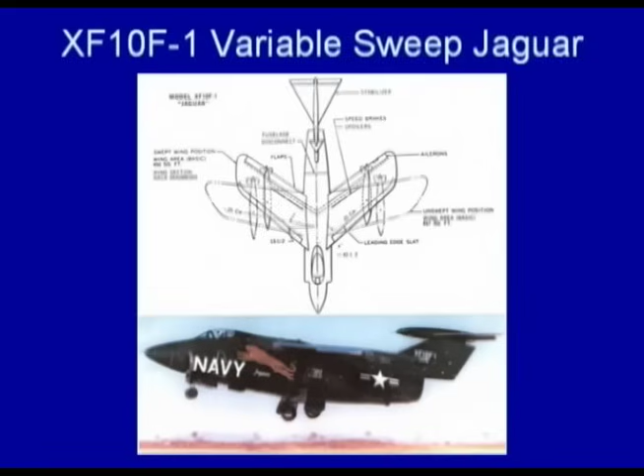Now let's go back and talk about the variable sweep history. This is a shot of the XF-10F variable sweep Jaguar. This was started in 1947. It morphed into a translating variable sweep wing, and it had an all-flying horizontal tail. You can see that right here on this particular chart.

Now, there were a lot of unique features about the XF-10F. It had a translating variable sweep wing. It had 80% Fowler flaps and paddle spoilers. Grumman, in a non-traditional sense, threw all their eggs into one basket, which was not the way we designed airplanes back then. Bill Schwendler, the chief engineer, allowed one new thing at a time, but he allowed the chief designer here, Gordon Israel, to do that.

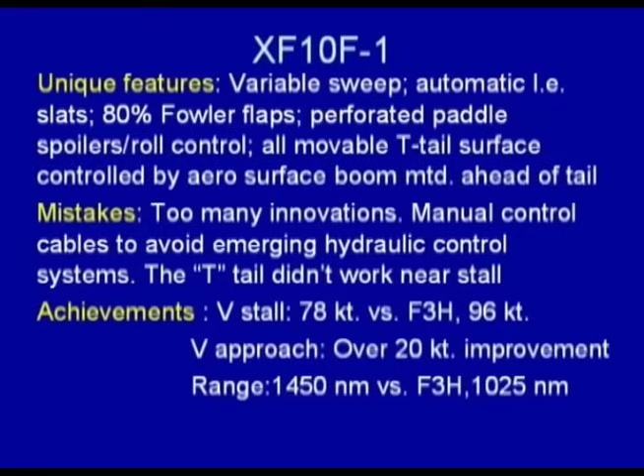There were too many innovations, but what really happened on the XF-10F is that it proved that the variable sweep wing would lower the approach speed by over 20 knots and almost a 50% increase in range over the F-3H Demon, which was operational in the fleet at that time. That was a conventional swept-wing fighter.

Now we move on to the F-111A, F-111B story. This began in 1959 when John Stack proved that you could actually create a variable sweep design and make it work with a fixed pivot.

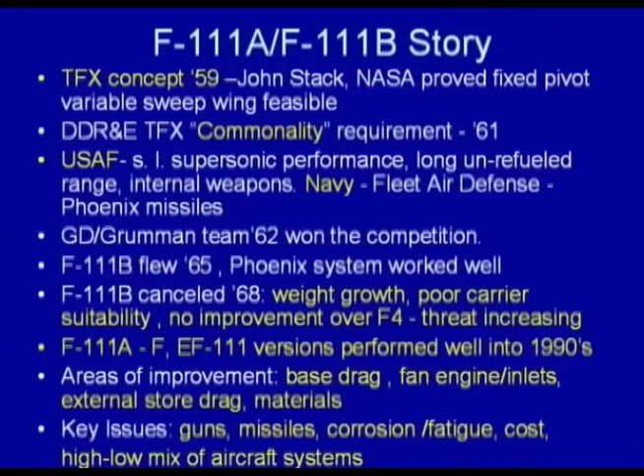That led General Everest to move ahead with a commonality requirement. He said we can design an airplane that could satisfy the USAF needs and the Navy needs, shown in Fleet Air Defense, and fly supersonically at low altitude at Mach 1.2 for 200 miles to penetrate the Soviet Union defenses. GD and Grumman won that competition, and Grumman was responsible for the F-111B. Unfortunately, it was canceled.

The reason it was canceled: it had unmitigated weight growth and really not very good carrier suitability. Although later they said they could do it, it had very poor vision over the nose, and the weight was just getting out of hand.

The big thing about it was it had no real air-to-air capability. It could not outmaneuver the F-4 Phantom. During the Vietnam War, the exchange ratio was about 1-to-1 with the MiG-21s until our tactics and pilot training made it better.

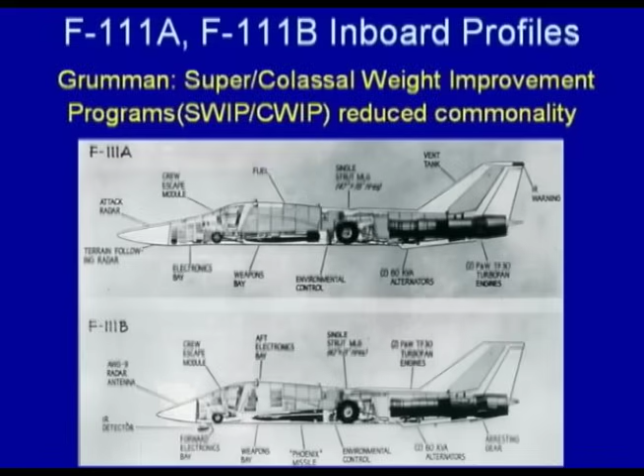But there were a lot of things learned from the F-111B which we took on to future designs: the treatment of base drag at the tail end of the airplane, how inlets interact with fan engines, external store drag and materials, as well as the use of guns and how missiles were really used in combat.

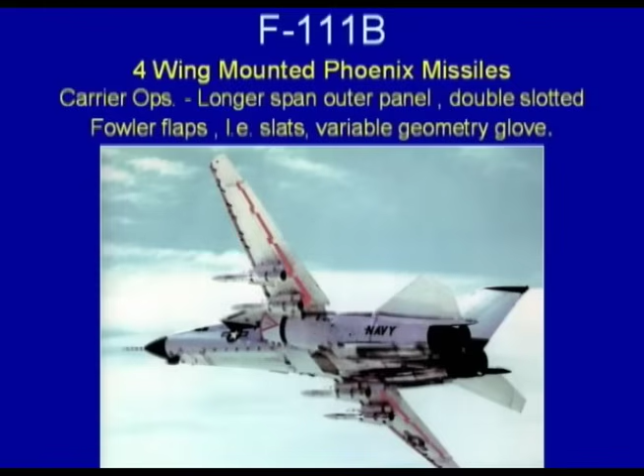This is a picture of the F-111B, one of the flight test birds. It had quite an advanced wing, shown here at about 26 degrees of sweep. It had double-slotted Fowler flaps and a movable variable geometry glove to achieve a lift coefficient of about 2.9.

It was not a good carrier suitability airplane in terms of approach and vision over the nose. The real drawback was the Phoenix missiles, which had to operate on swivelable pylons, which was a very cumbersome, unreliable, and highly drag-related item.

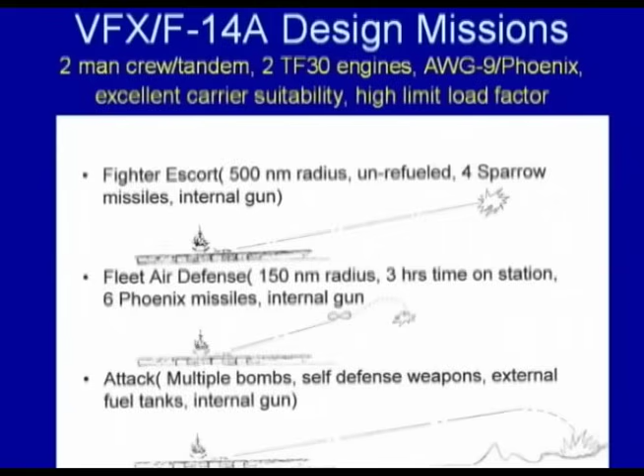So with all this background, the VFX competition was launched in 1968. The VFX became the F-14A. What the Navy wanted was a fighter for the fighter escort mission: fly 500 miles unrefueled with 4 Sparrow missiles and a gun, and they got that.

That mission only needed about 14,500 pounds of fuel, but the designers at Grumman had to satisfy the Fleet Air Defense mission, which required over 16,000 pounds of fuel. So they designed the internal fuel capacity for the Fleet Air Defense mission, but when they looked at its structural load factor, it was all based on the fighter design gross weight of the fighter escort mission. Some very good thinking went on there.

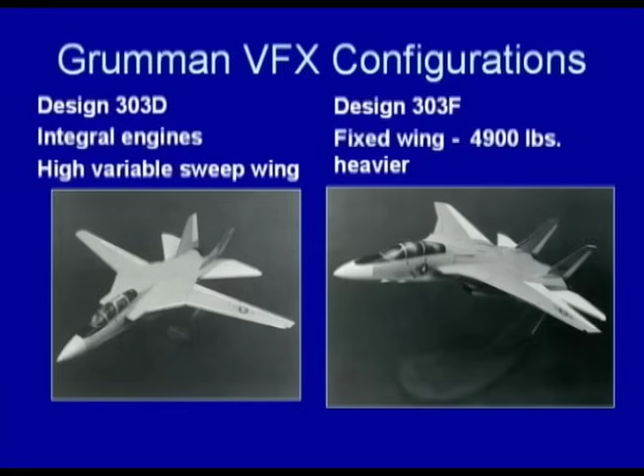I was personally involved in preliminary design at the time, and we did over 6,000 different studies of different airplanes. These are just some pictures of them: the 303C, which had engines side by side with a low variable sweep wing, and the 303D, which had engines close together with a high variable sweep wing.

And the 303F, which ended up about 5,000 pounds heavier because of the demands of carrier suitability to satisfy the Fleet Air Defense mission and other constraints.

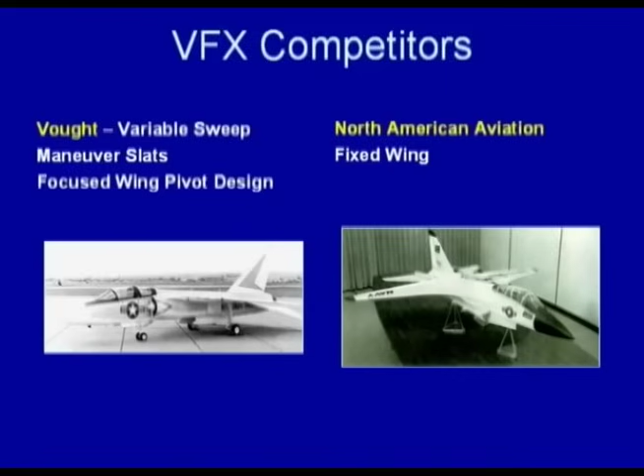The competition responded in almost the same way. North American Aviation came in with a fixed wing design, and Vought, along with McDonnell Douglas, came in with a variable sweep. George Spangenberg in the Navy said, go look at the Vought design after we won it, and take a look at their maneuvering slats, which we adopted on the F-14.

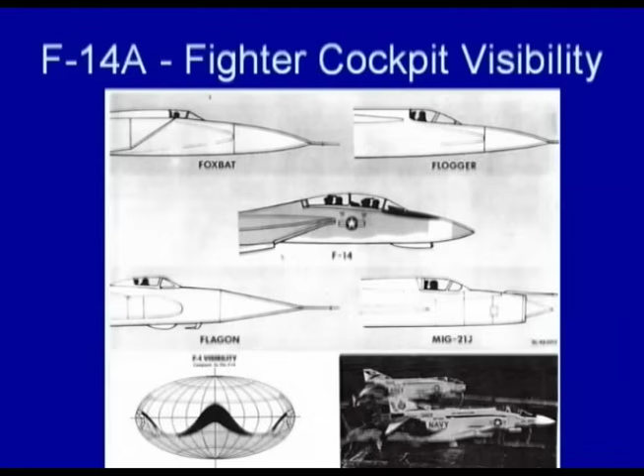When we set up the genealogy of the F-14, this is where the conservatism and design philosophy of Grumman came in. They said, look, we're only going to take one thing at a time. So the first thing they designed was a new airframe, the structural heart of the airplane. That's what gave the airplane its longevity and its life and its ability to handle the strike attack missions, as I'll tell you later on. Then we would jump to the F-14B with a new engine, and then to an F-14C with advanced avionics. Now, it really didn't turn out that way because of a lot of funding problems that occurred. I won't go into all that, but it did happen in terms of an F-14A, an F-14B, and an F-14D, which I'll tell you about later on.

Now, there were a lot of white rabbits that made the F-14 happen aerodynamically, and I'm going to briefly mention them. There were 7 of them. We thought we would get 4. But these were the white rabbits, along with the use of the titanium structure and the wing center section, that made the F-14 a reality.

We start with a variable sweep wing. We start with the fact that the wing was always sweeping automatically. The pilot eventually learned that he didn't have to move it; the computers took care of that, which I'll tell you about. The wing pivot selection was ultra critical in terms of minimizing trim drag. We used deflected leading edge slats and flaps for both takeoff and landing, but even more importantly, for subsonic, high maneuvering, high G aerial combat, which I'll show you in some of the slides. We incorporated glove vanes, which I'll tell you about, and then we went to a widely spaced nacelle concept. The engines were not close together, they were moved far apart, and we used something called weapons rails in order to mount all the stores on.

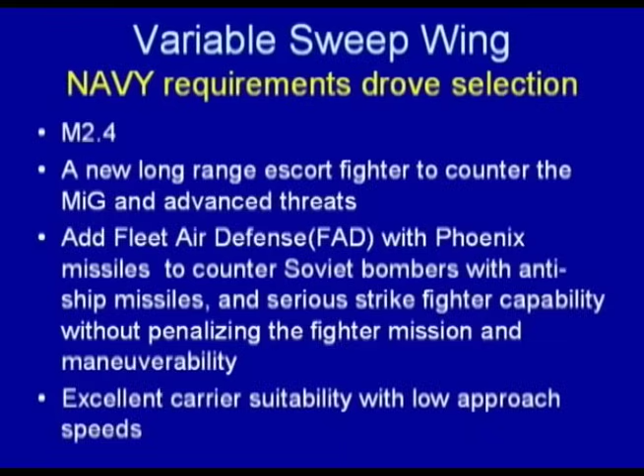Now, when we look at the variable sweep wing, at the time, it was the only solution that really satisfied the Navy's requirements. First, they wanted to go Mach 2.4. That required minimal cross-sectional area and a very thin wing. So when the wing was back at 68 degrees, you had a very small thickness-to-chord ratio. To satisfy the long-range escort mission of 500 miles, you had to cruise out 500 miles on internal fuel, so you had to have a very high aspect ratio wing with very high lift-to-drag ratio. And at the same time, they said, you know, we want you to do the Fleet Air Defense mission and land back on board the carrier with 6 Phoenix missiles and 4,000 pounds of fuel. That was roughly 10,000 pounds of weight at the time, which was unheard of.

Now let's talk about the next white rabbit, which was automatic wing sweep. This is the first technical chart, so bear with me; we have a few of them in the briefing. On the vertical scale you have relative lift-to-drag ratio, which has been declassified, versus Mach number. What you see is the variation of lift-to-drag ratio with various wing sweep angles. The dotted line shows how the Mach sweep programmer, through a central air data computer that was highly redundant, actually swept the wing to maximize lift-to-drag ratio for the particular performance that was required.

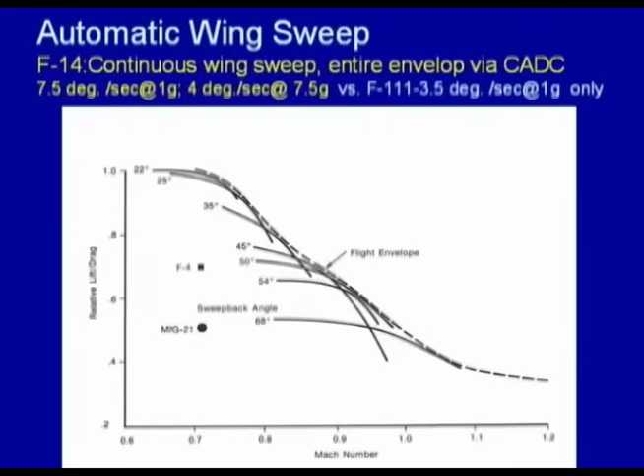Now you see the F-4 and the MiG-21. The lift-to-drag of the F-14 was about 15. The F-4 Phantom, depending on the version, was between 10 and 10.5, and the MiG-21 was about 7. So there you can see the tremendous difference in lift-to-drag ratio, which related to the turning performance we were struggling to get in that time period.

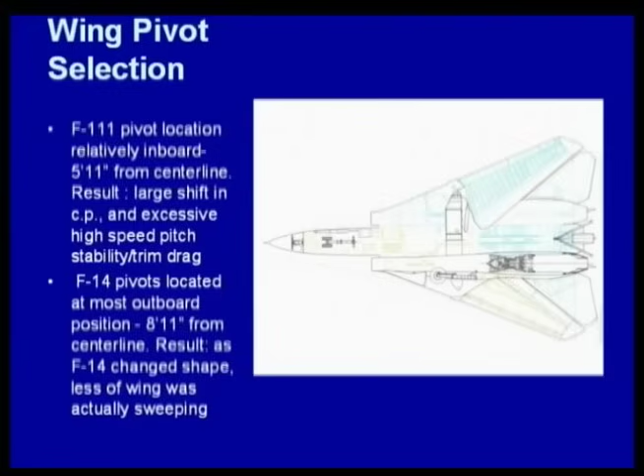The next point was wing pivot selection. Now we're getting a little deep technically here, but you've got to stay with me. On the F-111, when they developed the pivot design, the pivot was located fairly close to the center line of the airplane. As the wings came back, the center of pressure moved aft, which caused a tremendous change in trim drag and a lot of drag. On the F-14, they moved the pivots outboard, almost 3 feet more on each side. When the wing swept, less of the wing actually swept back, so the center of pressure didn't move as much, and guess what? They had less trim drag. This was all part of building the performance of the airplane.

Now let's talk about all the control surfaces. The F-14 had a lot of them: it had a glove vane, which I'll tell you about, and in the forward wing position it had leading edge slats, maneuver flaps, and an aux flap. Those flaps and slats had intermediate positions for maneuvering. It also had an overwing fairing and an airbag, which I will tell you about, which is very interesting in the next chart.

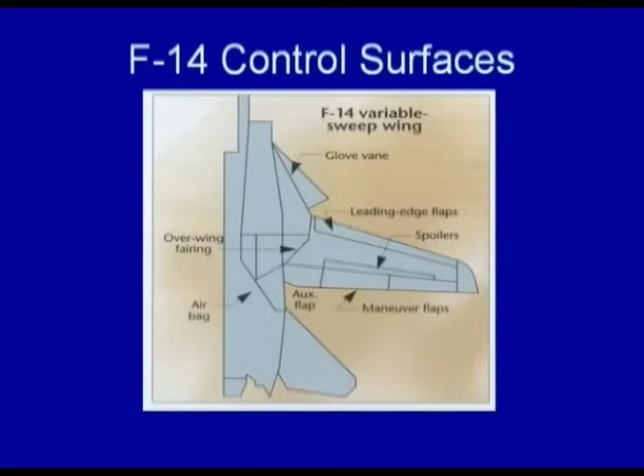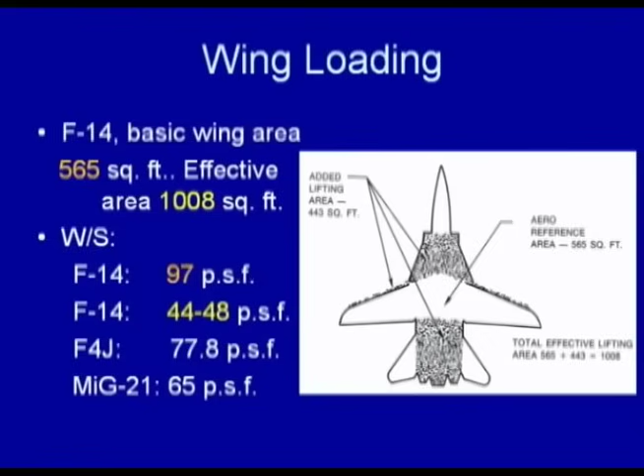Now, when we talk about wing loading on an F-14, you have a totally different translation, so to speak, because classically the wing area shown in white on the F-14 was about 565 square feet. But because the nacelles were widely spaced, it was literally a lifting body, so when the wing lift gave out, the body was still lifting. The true wing loading in combat for the F-14, with instantaneous turning and very tight turns in aerial combat, was more like 44 to 48 pounds per square foot, compared with the F-4J and the MiG-21, which were higher. Another secret of the design and the good thinking by all the people that evolved it.

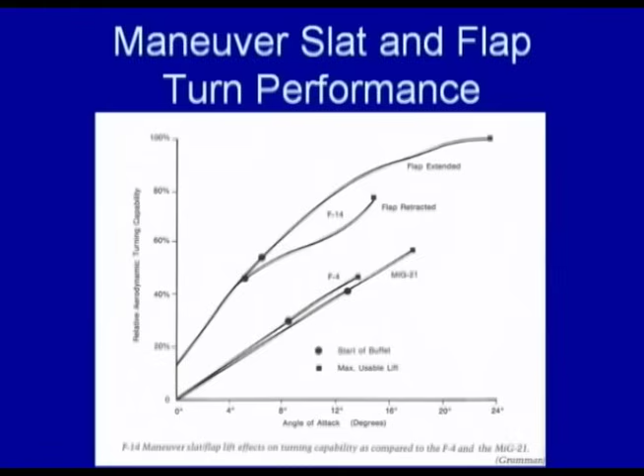Another technical chart. This shows the impact of maneuver slat and flap on turn performance. Here you see relative turning capability on the vertical scale versus angle of attack. On the lower portion, you see the F-4 and the MiG-21 running out of gas between 12 and 16 degrees. When the flaps and slats were extended, the F-14 went all the way out to 24 degrees angle of attack with almost twice the turning capability. This was one of the secrets of how this very big airplane could literally turn inside a MiG-21 and an F-4 in aerial combat. A lot of people didn't know that.

Now we get to something called glove vanes. The glove vane is shown here on the right. Let me orient you: you see the inlet right there, the landing gear, and that triangular shape. It comes out about 15 degrees. That was originally put in for the air-to-ground mode, because as the airplane was diving, it would come out and create a lift force forward of the center of gravity that countered the forces being put on the horizontal tail, lowering the structural loads in the rear fuselage. It was a tremendous load alleviation device, but also used for supersonic turning and in subsonic combat.

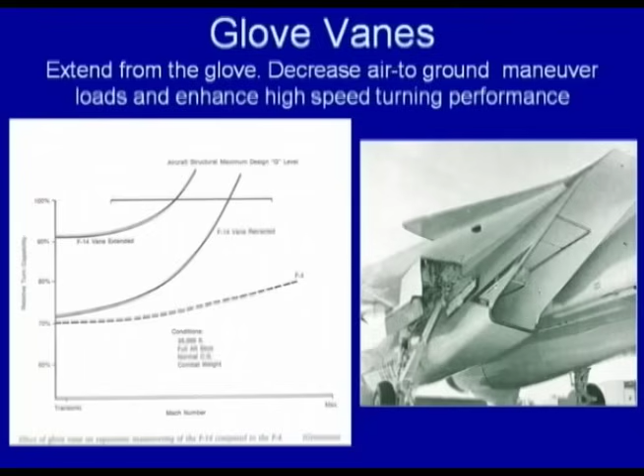Here you can see again, this is the last technical plot. This is relative turn capability versus Mach number. The dotted line is the F-4, and there you can see the F-14 with the vane retracted and the vane extended, turning right at the structural limit. In other words, the F-14 could pull 7.5 Gs at Mach 2. Imagine, at Mach 2, with a constant NZW product, but depending on the weight, it could pull that. It's really quite remarkable what was in the airplane.

Now we get to the next set of white rabbits, and these are the widely spaced nacelles. On the left, you see the orientation of the airplane from the front, with the widely spaced nacelles, and from the rear, with the convergent, divergent nozzles, either open or closed. I want to mention the two-dimensional external compression inlets and the convergent-divergent nozzles. This was a very simple design. The TF-30 was a bomber engine, as I mentioned, and it needed very clean air, so we couldn't turn the air a lot. We had to have a straight-through flow, and with the two-dimensional inlets, they positioned the shocks outside the inlet so nice, slow air could get to the compressor face. That was done very effectively.

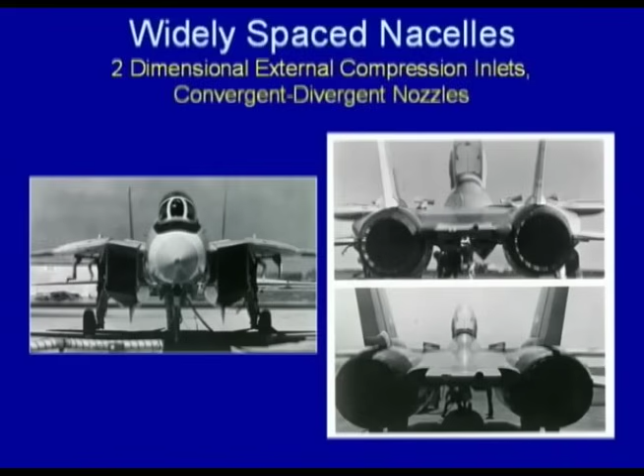In the back, remember I mentioned on the F-111B that base drag was very critical — that's where the air breaks away from the nozzles and causes drag. On the F-14, we did not have that problem because of the convergent-divergent nozzle. They were very clean, and you can see what happened. Now, in that channel between the nacelles is where we put all the stores. And the secret of this was in something called a weapon rail.

Now, the weapon rail, each one weighed about 1,000 pounds. It had its own internal hoist, and you could literally bring up from the bowels of the carrier a weapon rail with a Phoenix missile on it, which weighed 1,000 pounds. You could hook 4 of them on the bottom of the F-14 in less than 20 minutes. You could rearm the airplane, then land, put bombs on it, and what have you.

What happened is that, as opposed to the F-111B, where they had an internal bomb bay, we had everything external in the channel in a low drag installation. When we designed the airplane for all the structural load factors and what have you, we didn't have to carry that weight penalty. That was an overload condition, so it saved a lot of weight.

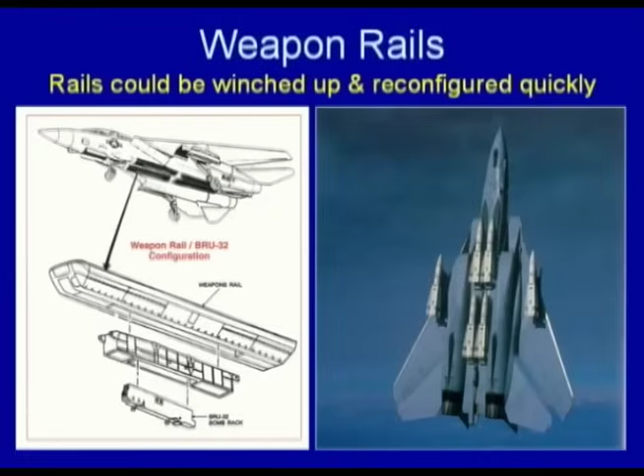On the right here, we see a picture of the F-14 with 6 Phoenix missiles in a vertical climb, and you can see the very low drag installation with the fairings in front of the missiles.

Now we get to a favorite subject of 2 of my colleagues in the back, Carlos Paez and Harvey Eidinoff, who were really the structural pioneers in many ways on the F-14. Carlos was responsible in large part for the design of the wing box, and Harvey was responsible for the fatigue aspects of the airplane, and I say that with a great deal of respect.

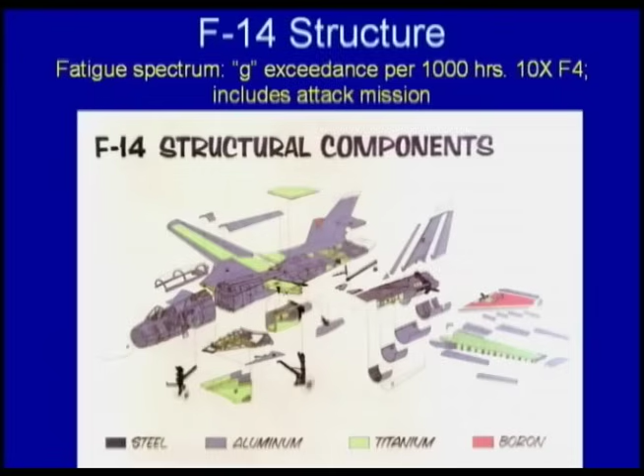Let's take a look at the structural components and orient ourselves in color. In blue is aluminum, roughly 40% of the weight, that is the airframe manufacturer's planning report weight. The green was titanium, 6Al4V titanium, almost 25%. You had boron epoxy used for the first time in the horizontal tail, a long way from the center of gravity of the airplane, where weight was very critical, and that saved about 300-400 pounds.

And the rest of it was steel. Now, one of the things that happened on the airplane was the titanium wing center section, which was really the heart and soul of the airplane.

What Grumman did, they formed a titanium committee several years before the actual award, and they began to study the use of titanium that would be key in keeping the structural weight down to a low level, as I'll show you in following charts. They bought the electron beam welders shown in the background, 3 of them from Boeing, from the supersonic transport program. They ended up creating an 80,000-foot, unique in the world, titanium welding facility.

And what was created here after many, many, many months of testing and article testing was a titanium wing box shown there in the foreground, as follows: 22 feet long, weighed about 2,000 pounds, 900 pounds less than an all-bolted steel box.

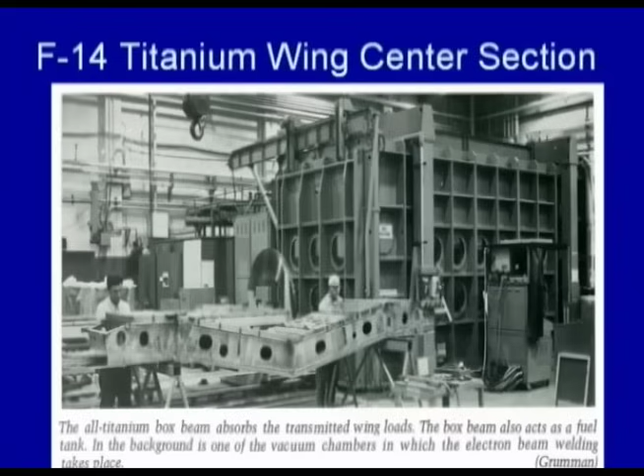It carried go-home fuel in it. It had 35 subassemblies that were put together with 70 welds, all done in a vacuum chamber with welds from 1/2 inch to 2.5 inches thick. Imagine what had to be done to put this together. It was probably one of the most unique structural things done in the world at that time.

Lockheed was working on titanium, but they were using it for the SR-71. That was a black program.

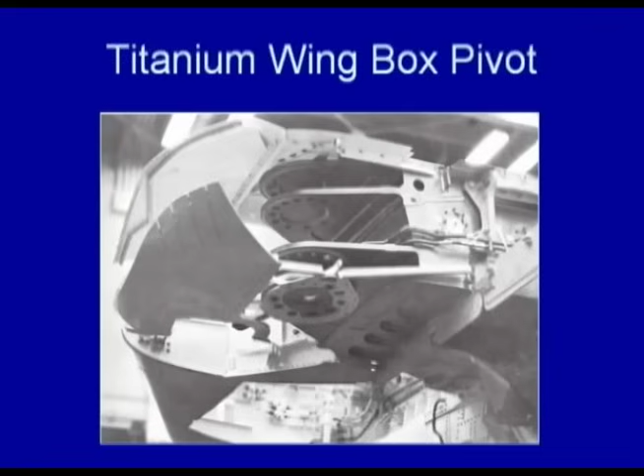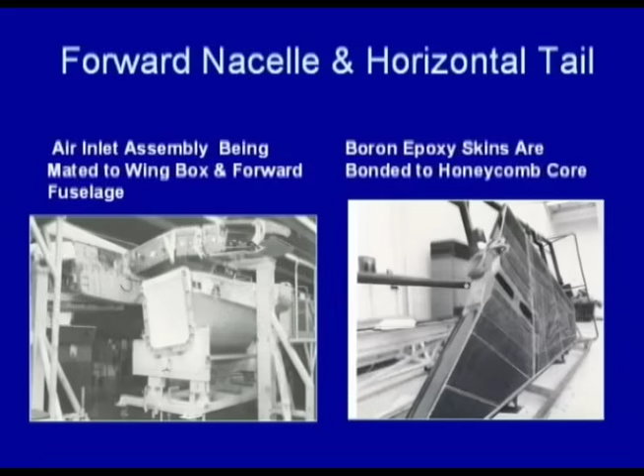The other part of this was the thing called fracture control and non-destructive testing, because normally with this type of structure, the Navy did not like welded structures in primary structure. They wanted bolts, things that you could hold on to. So what had to be developed was a whole series of tests and analytics to determine that each one of those welds was solid. And indeed, the first 36 of those boxes that were built were tested to 115% of limit load, just to prove to the Navy that they worked. And it worked extremely well.

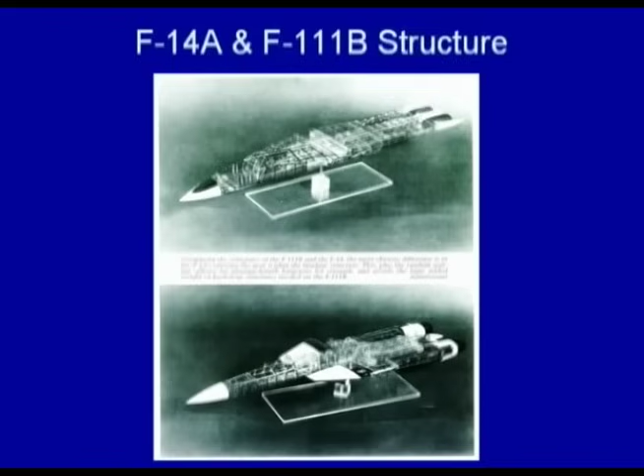When you added this all together, you found that the F-14, in terms of its primary structure, because they were about the same size, was almost 10,000 pounds lighter. And when you looked at it very carefully, you saw the use of titanium.

The F-15 also had titanium in it, about the same amount, but the F-4 only had about 9%. You had the Mach sweep programmer. Remember I told you how the wings swept automatically. It limited the wing bending moment that we had to design to.

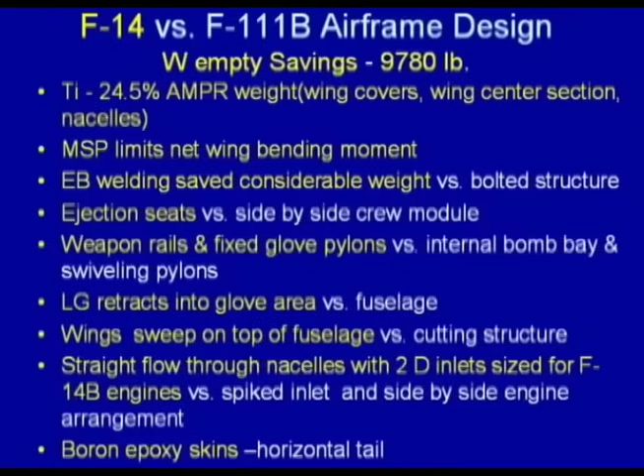Electron beam welding saved considerable weight in the airplane versus a bolted structure. I talked to you about the ejection seats, the weapons rails, the landing gear, the wings on top of the fuselage, the straight flow-through ducts, and the boron epoxy tails. All of those added up to almost a 10,000-pound reduction in the airframe weight. And that was the key that allowed the F-14 to grow, in terms of capability, over 40 years.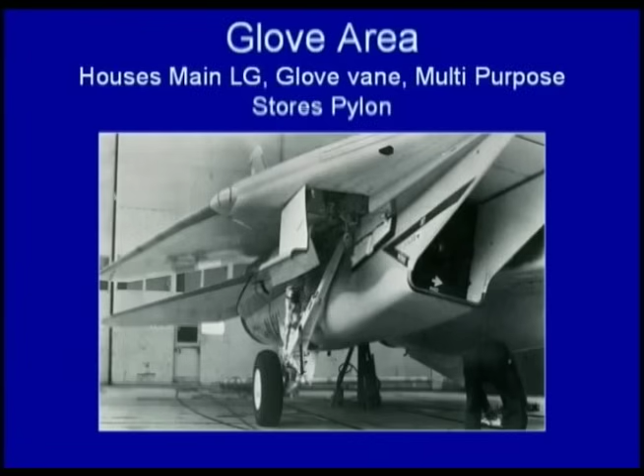This is a picture of the glove area. I showed it to you before, but there you can see the wing in the oversweep position at 75 degrees. That's the wing glove there, and you can see the landing gear that retracts into the glove as opposed to cutting primary structure.

Now let's talk a little bit about the engines. This is a very interesting and somewhat sad story, and yet it had a happy ending. It took a little while to get there.

What we see on the upper picture is a picture of the TF-30 engine, which was inherited from the F-111B. We thought we could use it in the fighter because it had already been developed. In the lower portion, you see the F-110 engine, the General Electric F-110 engine, which was used in the F-14A Plus and B version. Now, you really had 1960 versus 1980 technology.

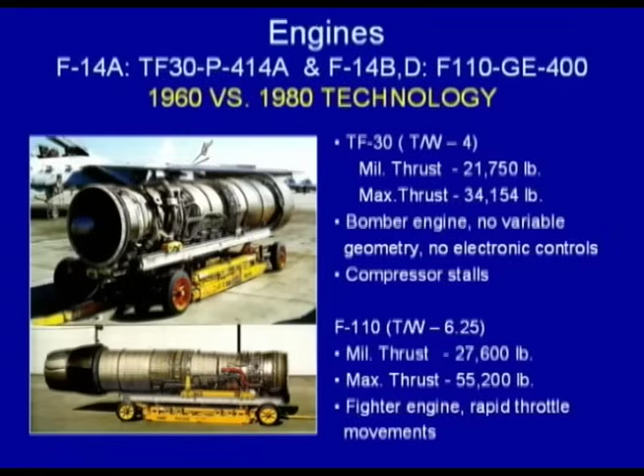The TF-30 engine was essentially a bomber engine. It suffered from compressor stalls because you have to remember the F-14 was turning at very high angle of attack, very tight turns. The pilot wanted to slam the throttle. That engine could not tolerate that at all. And we found that out very sadly as we got into operational service.

So they had to put operating limitations on it. It still was able to perform very well in the AIMVAL/ACEVAL test in '73 against the F-15, where they had a 2-to-1 advantage over adversaries because of its tight turning capability subsonically.

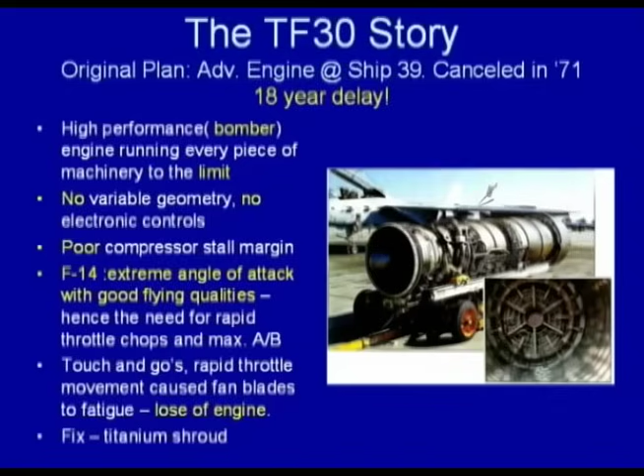But it wasn't until 18 years later that the final engine got into the F-14, where the pilot could literally take the throttle and slam it back and forth with no problem at all. And there you had an airplane with very high thrust to weight who could compete with almost any airplane.

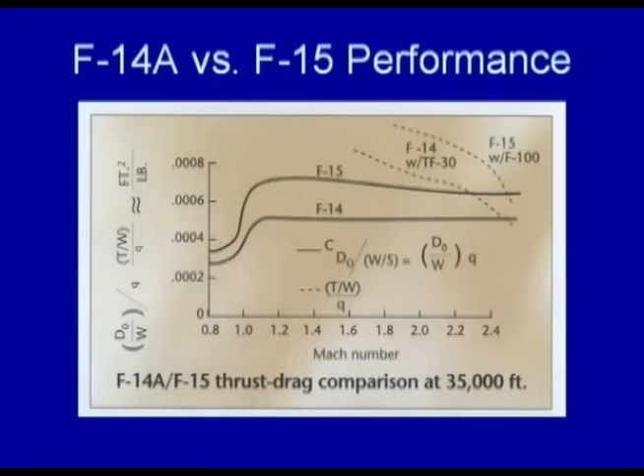And you can see the difference in thrust. The thrust to weight on the top and the bottom has to do with the thrust to weight of the engine. You can see almost a 50% increase in thrust to weight over the TF-30 versus the F-110. And by the way, it was 50 inches shorter. Just an incredible change in technology.

Now we're going to talk a little bit about the weapons system. The F-14 would not be the great airplane that it was without the AWG-9 radar that was developed by Hughes Aircraft. I say that with a great deal of sincerity because I worked very closely with those folks. The AWG-9 in its day was at the top of its class.

It had a very large antenna. That's one of the flight test airplanes. It had an excellent fire control system in it, and Hughes was able to take almost 700 pounds out of the AWG-9 to put it in the F-14 from the F-111B, and also reduce the amount of volume for all the boxes from 46 to roughly 30 cubic feet.

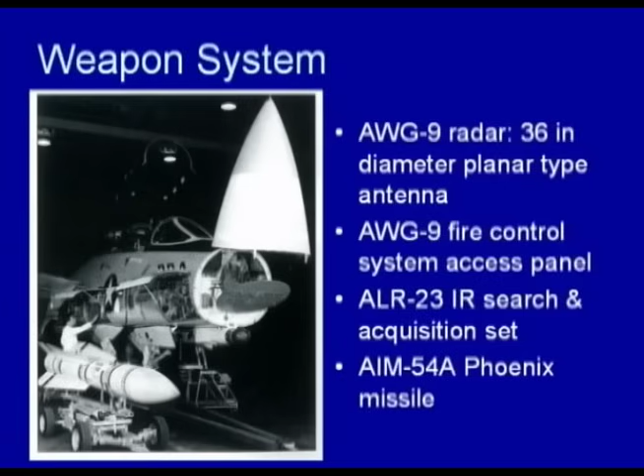And the AIM-54 missile down here was about 1,000 pounds. I mean, it was a long missile, very, very big. And the capabilities were really, really remarkable when you looked at them.

First of all, in the pulse Doppler mode, it could detect targets in excess of 190 kilometers. Actually, it was much farther than that. It had the ability to track while scan 24 targets at a time. You could not do this with the Phantom.

And it had the ability to launch multi-shot track while scan 6 Phoenixes. I'll show you that in one of the test sequences. And the later versions of the Phoenix also had electronic countermeasures capability because the threat was actually changing.

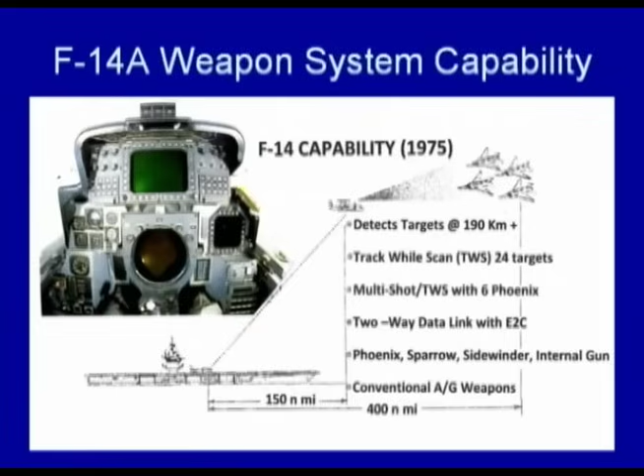And it had the ability to handle the Phoenix, the Sparrow, the Sidewinder, and the internal gun as well as conventional weapons. Now this is a very interesting chart because when you look at it, one of the unique things that happened on the F-14 is when they put the F-14 out there with the E-2C, they began to develop a total strategy for air defense.

Remember, they both came up separately. They put them together and they could range the E-2 way, way out beyond 400 miles. You could have the F-14 sitting on the deck getting all of that information shown on the tactical information display before he actually took off.

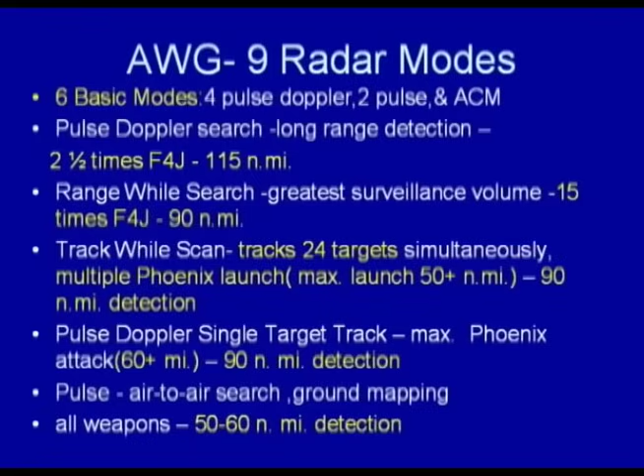Now, I'm not going to dwell on this chart. This shows all the radar modes, but I thought we would have a few electronic folks in the audience. Just draw your attention to the yellow. In the pulse Doppler search mode, the range of the F-14 was 2.5 times that of the F-4J. In the range-while-search mode, the volume was 15 times greater.

And the difference, you realize the Sparrow was a semi-active guided missile that had to be illuminated by the radar at all times. With the Phoenix missile, you could launch it from as far as 60 miles away, and it had its own active terminal seeker, so it went way up and over and came down at over Mach 3 and could take out a target at 60 miles away. You could literally outpunch anybody at the time.

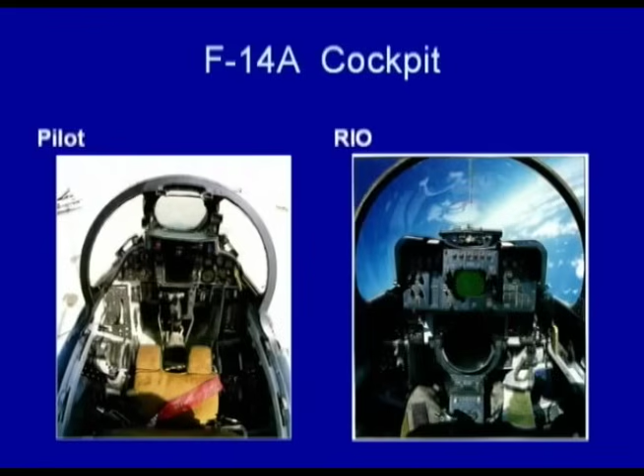This is a picture of the pilot and the RIO operator in the F-14A. On the left, you see a classical heads-up display. It's hard to see, but he had a horizontal and vertical indicator group displays on the left. And on the right, the RIO had the detailed data display for pulse Doppler search and a tactical information display, a big screen that showed the whole radar world.

Now, the big thing about the F-14, you can see the visibility. In air-to-air combat, that guy in the back seat was looking all the time in terms of seeing where the enemy was. It really meant a lot in air-to-air combat.

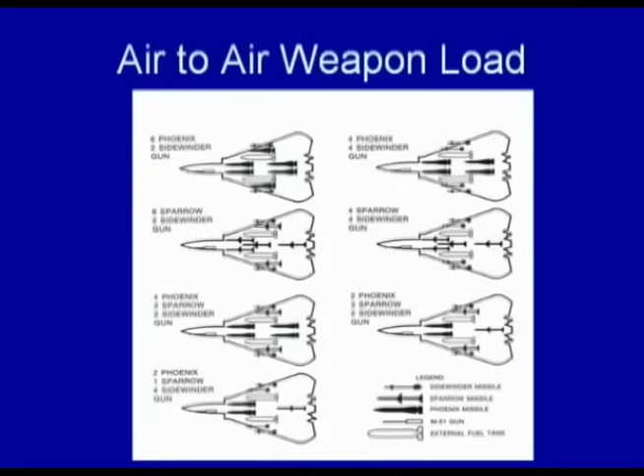This is a look at the various air-to-air weapon loads. There are many different types of configurations. One of the classical ones was, second from the left on the bottom, 4 Phoenix, 2 Sparrow, 2 Sidewinder, and a gun. Nobody could bring that kind of capability into a fight.

And what the F-14 really wanted to do was take you out at long range. But if he had to get close, he could maneuver with the best of them. This is another picture, a larger one, of the load with 6 Phoenix.

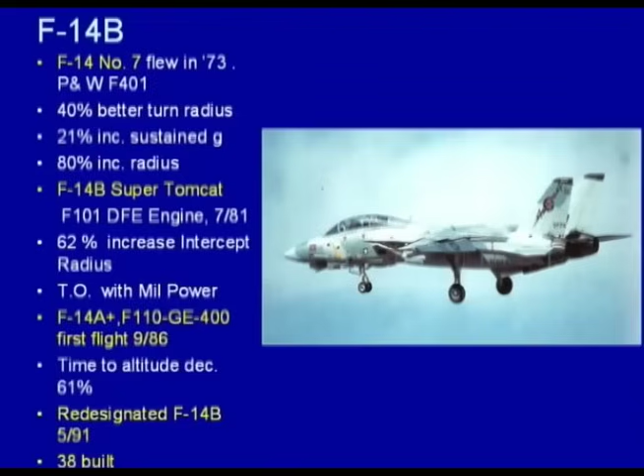Now we get to the F-14B. Remember I said the F-14B took about 16 years to mature. Remember, the plan was to only build 67 F-14As, including the prototypes, and then go to the B. Unfortunately, there were tough financial situations.

And way back in 1971, Secretary Packard said, 'We're not going to spend the money on it, you live with the TF-30.' And the Navy said, 'Yes, sir.' But they were not happy about it. So they kept pushing and pushing and pushing. Eventually, after number 7 flew in '73, they had the Super Tomcat fly with a derivative fighter engine in '81. And then eventually in 1986 and down to '91, the F-14B entered service.

It was a magnificent airplane because it finally reached the right thrust-to-weight for its size. And as I say, the pilots had literally carefree performance. They could slam the throttles back and forth with no problem.

And this is a picture of the F-14B in a strike mode with 4 Mark 83s. Now, the interesting thing about the weapons rails is they could handle a 2,000-pound bomb and also the big GBU bombs, which I'll show you in the next charts.

Because what was happening now, as we're into the late 80s and into the 90s, the technology was reaching the point where we could now really put into play a strike fighter, which I'll tell you about in the next charts. And here it is.

This is the ultimate F-14. It was originally the C. It ended up being the D. But what it had in it was an APG-71 radar, again developed by Hughes Aircraft. They took pieces of the AWG-9, they took the radar out of the F-15E, the APG-70, and they created a wonderful system called the APG-71.

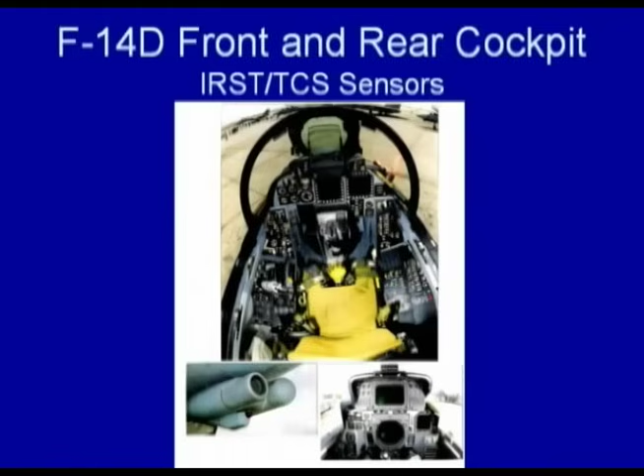This is a picture of the advanced cockpits in the D, which had a brand new front cockpit with a multifunctional display. It had a redo of the aft cockpit for the RIO, again with a new multifunctional display, and it had a chin-mounted infrared search and track as well as a TV dome to enhance its air-to-ground capability at night. This was the final loadout of the airplane.

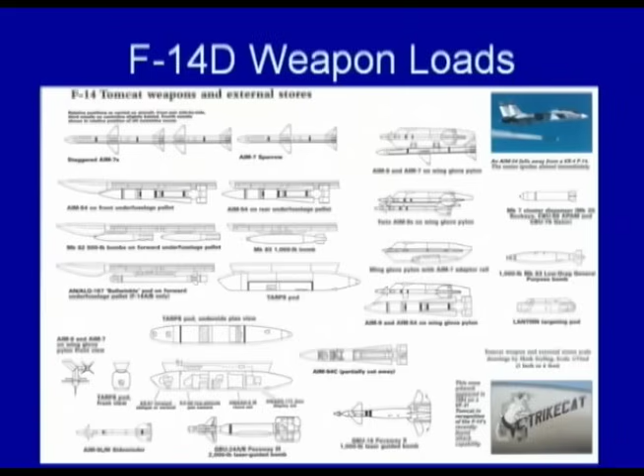I told you a lot about the Sparrows and the Phoenix missiles. Over here on the right, you see the LANTIRN pod, the TARPS pod, and the guided bomb units, the GBUs, which are used a lot today by the F-15E and other top airplanes. This is just one more picture showing the loadout versatility of the airplane and the uniqueness of the weapons rails. Here you see a TARPS pod with another jammer pod located forward of it, with Sidewinder missiles and what have you.

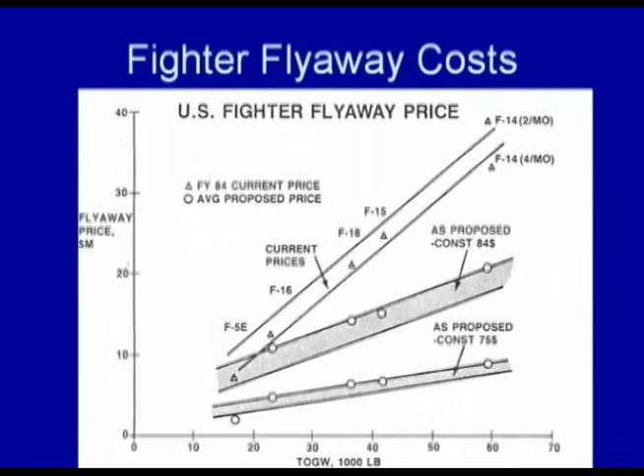Then we get to a sobering thing called cost. You remember way back on the F-111B chart, one of the things I didn't mention was cost. Well, airplanes sell like chickens - they sell by the pound. Here's a plot of flyaway price versus takeoff gross weight. On the lower level is what was proposed in constant '75 dollars - some of you remember 1975. Then if you went to '84 dollars, it pitched up. But if you put inflation in, you saw the real prices of the airplanes. Obviously they're rate-driven, and you could see the difference of the F-14. But remember, the F-14 had almost 3,000 pounds of avionics compared to the smaller airplanes, so obviously it was going to be more expensive. In those days, they sold by the pound - the bigger the airplane, the more expensive.

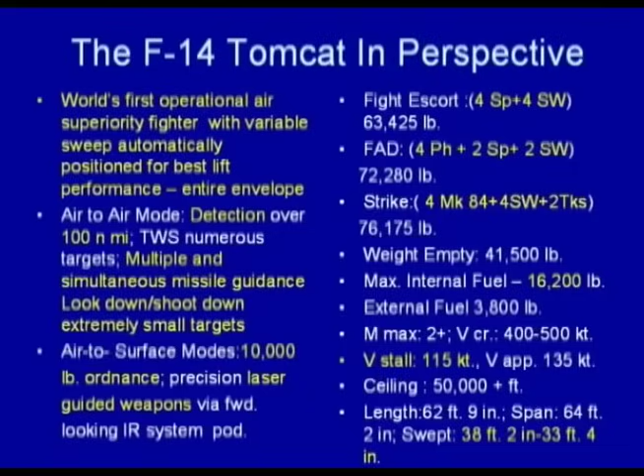Now we're getting near the end, and I'm just going to put it in perspective: it was the first operational air superiority fighter with a fully automatic variable sweep wing. It was quite a unique capability - no other airplane has accomplished that. It had multiple and simultaneous missile guidance and look-down, shoot-down at extremely small targets. As a strike fighter, it could carry 10,000 pounds of ordnance hundreds and hundreds of miles - depending on the mission, it could reach out almost 1,000 miles. It's really quite remarkable, and it did not lose good carrier suitability, with a V approach of 135 and a V stall of 115 knots.

So we're getting to the summary now, and again I want to say that a great deal of credit goes to the Navy's uniformed and civilian leadership. I can't mention all the people I interfaced with, but I did know Tom Connolly, Admiral Tom Connolly, and George Spangenberg, who were really great leaders, fine engineers, and visionaries who made the F-14 happen. The design team, led by Mike Pelehach, surrounded himself with the best and the brightest. Irv Waaland was head of Aero - Irv is here - and Carlos Payos did the titanium wing box, and Harvey Eidinoff was in charge of fatigue. So he surrounded himself with the best people, and Bob Kress was the chief engineer.

Wonderful things - it fulfilled all its mission roles over its life. Personally, it could outpunch anybody. It was like the SR-71 - you couldn't touch it at long range, because the Russians were actually afraid of it. They stopped flying the MiG-25s out of Baku over Iran in the early days because the F-14 could intercept it.

And it retired at the peak of its performance. The F-14Ds were still actively being deployed, and their role is now being filled by some excellent airplanes - the F-18 E/F, the F-35, the F-15E, and the unmanned tactical systems which are coming along. So ladies and gentlemen, that's the end of my story.

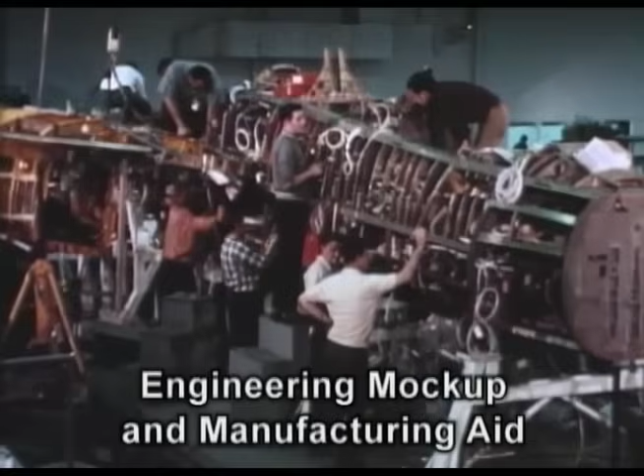There you can see the two-dimensional nozzle. We won the competition. There's Mike Pelehach, and there's the mock-up out on the field. This is the engineering mock-up and manufacturing aid called EMMA, which we used to figure out how to build the thing. That was quite an instructional thing.

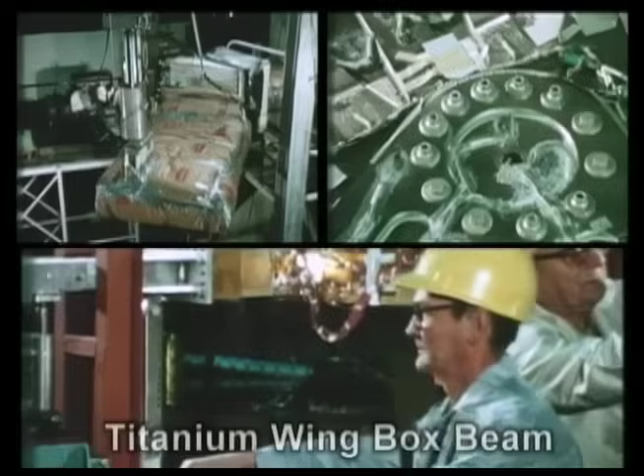You can see the various sections coming together. This is the bearing being put into the platter. Each platter on the F-14 was 2 inches thick. These are all the tests done to prove out the electron beam welding techniques, and you can actually see some of the welding going on right there.

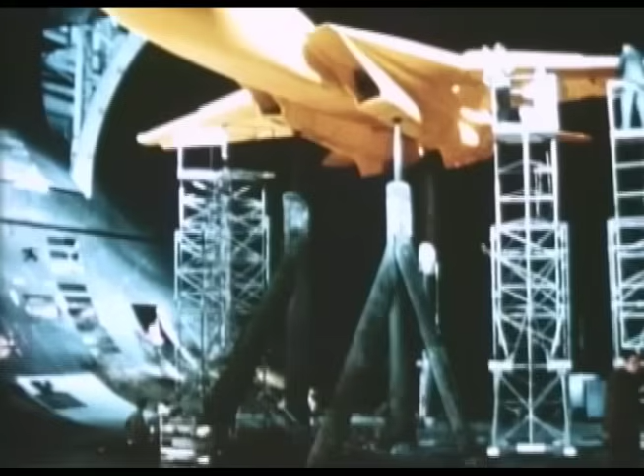This is the mounting of the boron skin on the composite stabilizer, which, by the way, we couldn't break. We tested it to 4 times life. We couldn't break it. This is a full-scale wind tunnel test, which I'm sure Irv remembers very clearly.

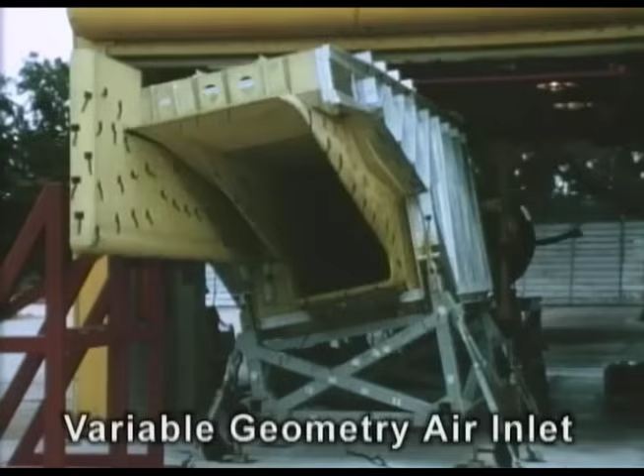Some of the flow visualization tests to look at the drag and flow fields. This is the full-scale inlet test, just to see the way the air actually flowed coming in. This is the fuel slosh test. Now you can see the wing box that had the fuel.

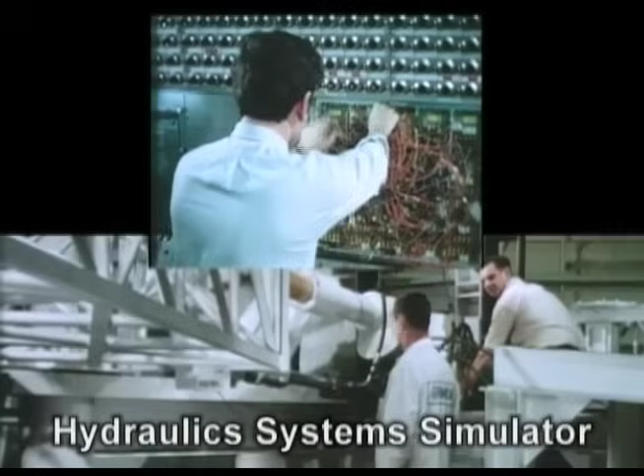This is the hydraulic systems simulator. I was talking to a gentleman here that understood a lot of that, and we actually used a PSI system. This was the windshield tests and rain removal tests, which we did.

We established a systems integration test stand out in California, where we actually took all the equipment and put it together in its actual confines of the fuselage, where we looked at vibration and temperature.

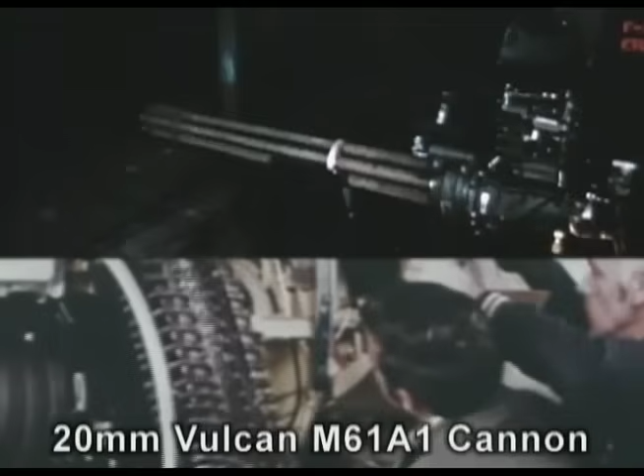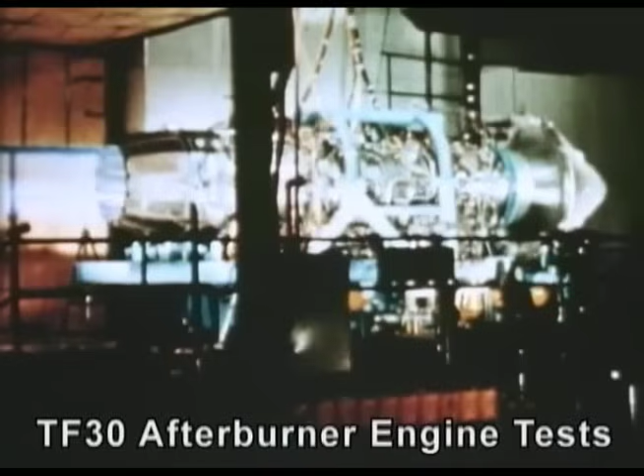These are the gun firing tests using the M61 cannon. I can tell you an interesting story about that. These are the early tests on the TF-30 with the afterburner, and there you can see the CD iris opening up as we went to maximum afterburning power.

These are some shots of the flight test. This is the second flight of number 1. We lost this airplane because the backup hydraulic system did not work, and I can explain that to you a little bit.

You can't see it too well, but the fluid was leaking out. They had roughly 1 second to eject, and they did. Both pilots survived, and they flew again another day.

This is number 2, first flight with an all-steel hydraulic system. They made us take out the titanium. We eventually put it back. This was 1X.

Doing very high alpha tests, and in the upper right there, you couldn't see it, but it actually had an asymmetric wing sweep test. We could actually land the airplane with one wing at 60 degrees and one at 20, at about 170 knots. That was demonstrated on a field.

These are high angle of attack tests. There you see the controllability of the airplane at very high angle of attack. That's Joe Burke taking number 7 to over Mach 2.4.

These are the catapult tests that were done at Lakehurst, and this is the first carrier arrestment that was conducted, and they found out they had a winner in terms of its airplane handling qualities. These were gunfire tests at high altitude.

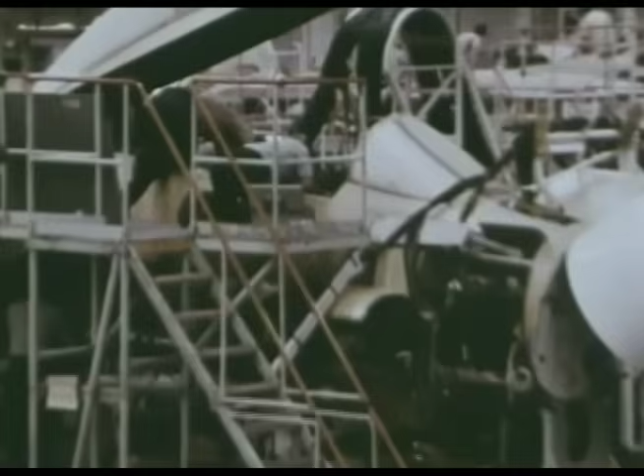And this was the production line. At one point, we were building as many as 6 a month, 72 a year, and building 10 wing boxes a month coming out of that titanium facility.

This is the production line out at Calverton. This is the 6-on-6 Phoenix shot that was conducted. Now, I guess 5 out of the 6 hit their targets. The 6th one, they say, probably would have gotten it, but it did miss. But they had subsequent other multiple shot targets that worked very well.

This is the Super Tomcat flying with the derivative fighter engine. This is the one where we got like a 60% increase in time to climb to altitude. Absolutely remarkable performance.

And this, of course, is the F-14D, which was the ultimate strike fighter that I told you about. And there you can see the engine installation. These are pictures of the F-14s being deployed. They kind of speak for themselves.

The nice part about it is, as a big airplane, it had an oversweep of 75 degrees, so the spotting factor, the silhouette on the deck, was actually less than the F-4. It was really quite remarkable, or comparable to it.

There they are in echelon configuration. Now there's an ACM shot with the wings being forward.

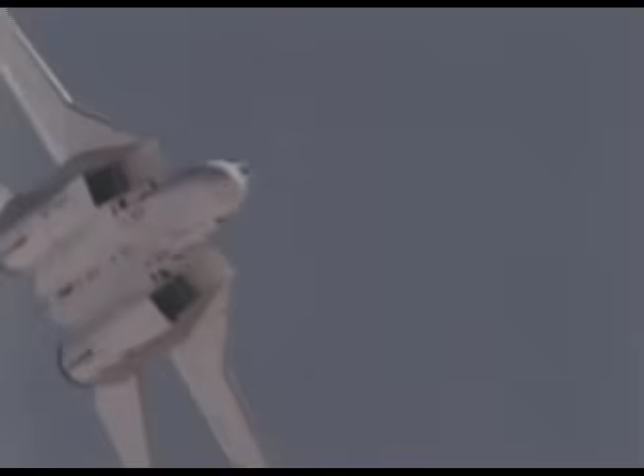Now remember, the pilot in ACM did not touch the wing sweep. It was all done automatically. The wing positioned itself through the central air data computer. It knew exactly where it was: altitude, temperature, pitot, static pressure, total pressure, Mach number, and it moved that wing. The pilot did not have to touch that wing at all.

Now, these are just a couple of films it was in. There you see Kirk Douglas in The Final Countdown. In one scene he says, 'Launch the F-14 Tomcats,' and there you see some pictures. And of course, it was the sweetheart airplane in Top Gun, which is coming up next, which many of you and your children have seen. It was really a wonderful picture.

In fact, the head of VX-4 is a good friend of mine, did these flight sequences against adversary airplanes. These were really ACM shots that were taken. Now of course, with Tom Cruise, he was not in the cockpit at the time, obviously.

Now this is the fighter fling, which really got involved with a lot of the tactical development on the airplane. These are wonderful shots - there's shock waves forming, some of the pictures with multiple loads, arrestments, ACM shots, multiple takeoffs.